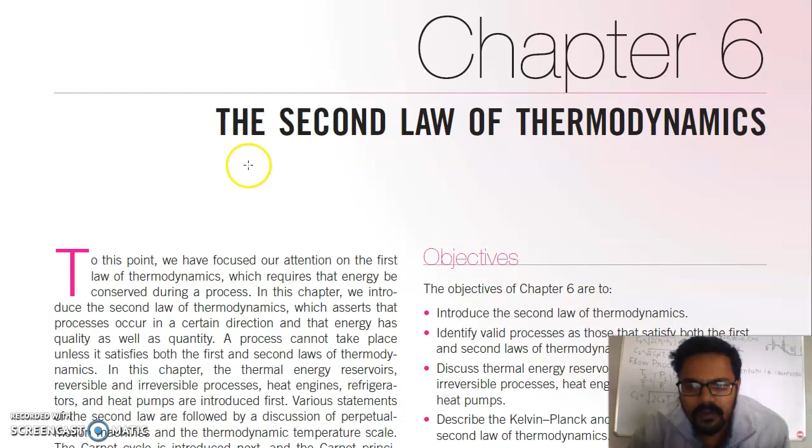Good morning. Today we will start with the topic, the second law of thermodynamics.

Up to now we have focused our attention on the first law of thermodynamics, which requires that energy be conserved during a process. In this chapter we introduce the second law of thermodynamics, which asserts that processes occur in a certain direction and that energy has quality as well as quantity. A process cannot take place unless it satisfies both the first and second law of thermodynamics.

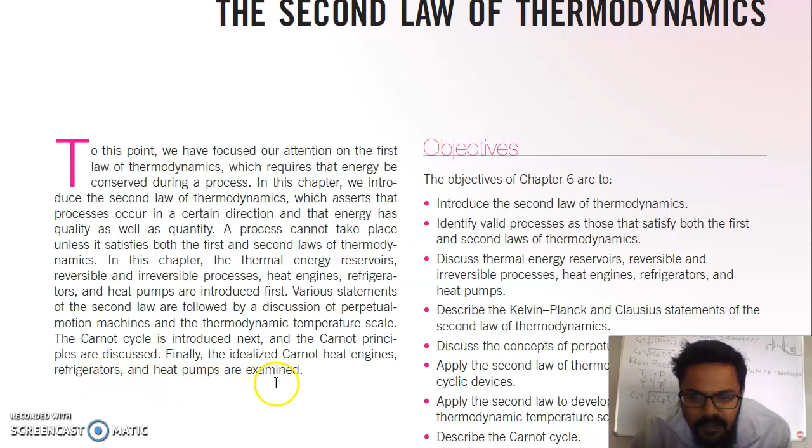In this chapter, the thermal energy reservoirs, reversible and irreversible processes, heat engine, refrigerator, and heat pump are introduced. Various statements of the second law are followed by a discussion of perpetual motion machines and the thermodynamic temperature scale. The Carnot cycle and the Carnot principle are discussed. Finally, Carnot heat engines, refrigerators and heat pumps are examined. Their performance is also discussed.

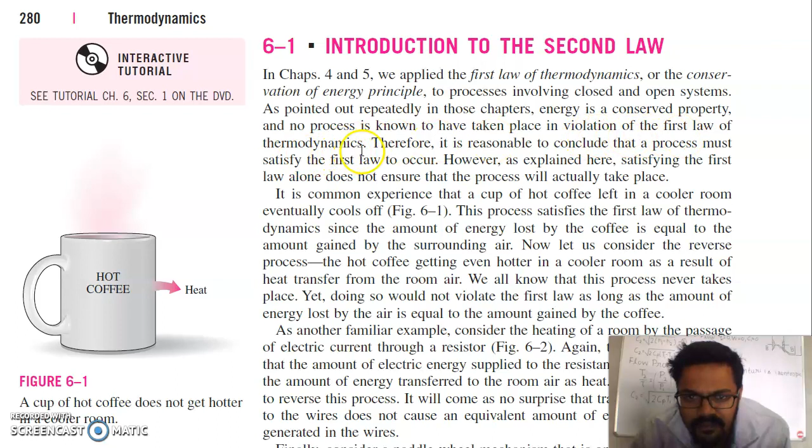So we will start from the first topic, that is introduction to the second law. The first law of thermodynamics, or the conservation of energy principle, applies to processes involving closed and open systems. As pointed out repeatedly in those chapters, energy is a conserved property and no process is known to have taken place in violation of the first law of thermodynamics. Therefore, it is reasonable to conclude that a process must satisfy the first law to occur. However, satisfying the first law alone does not ensure that the process will actually take place.

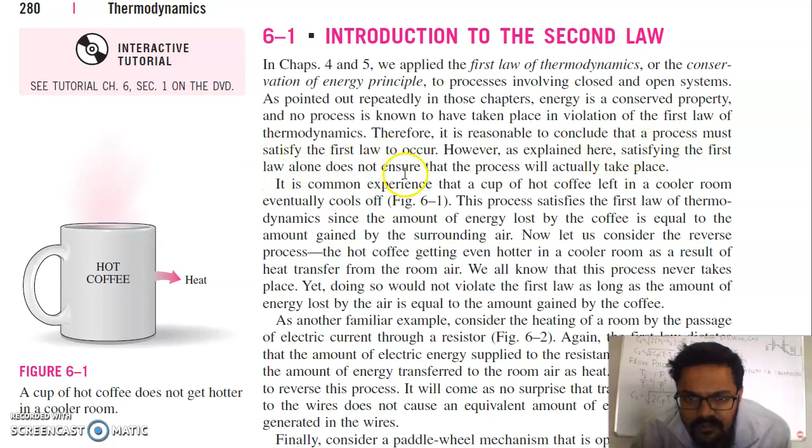It is a common experience that a cup of hot coffee left in a room eventually cools off. This process satisfies the first law of thermodynamics, since the amount of energy lost by the coffee is equal to the amount gained by the surrounding air. Now let us consider the reverse process, the hot coffee getting even hotter in a cooler room as a result of heat transfer from the room air. We all know that this process never takes place, yet doing so would not violate the first law as long as the amount of energy lost by the air is equal to the amount gained by the coffee. This means heat will flow from the hot coffee to the cold environment; heat can't flow from the cold environment to the hot coffee.

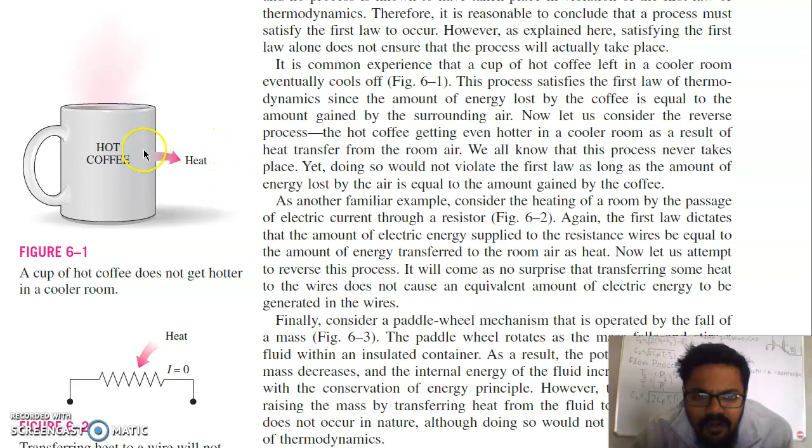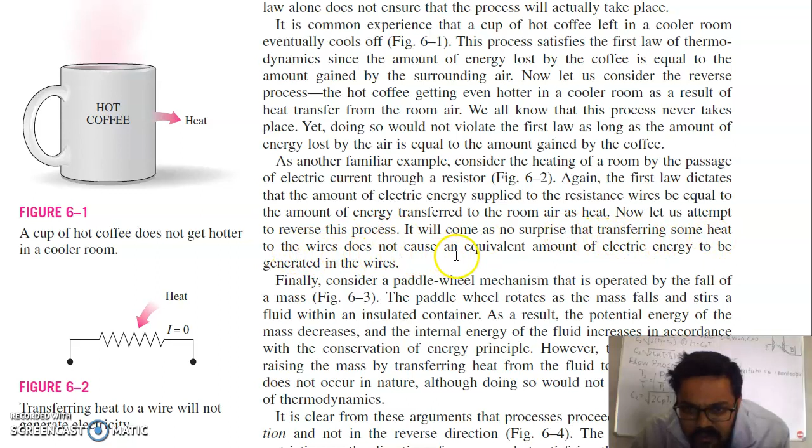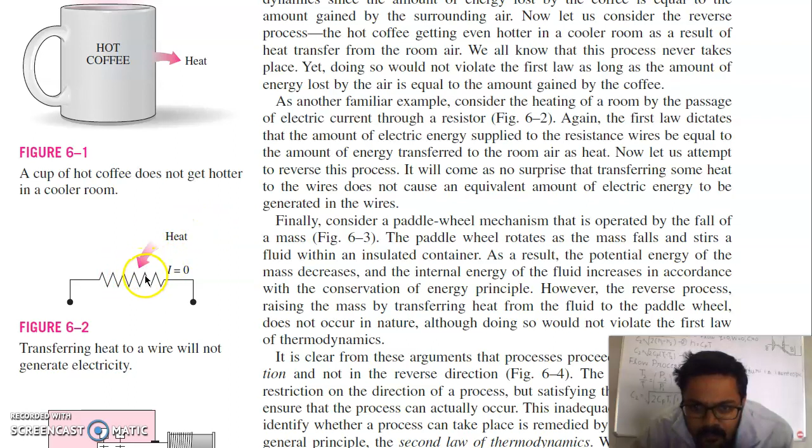Another example: consider heating of a room by passage of electric current through a resistor. This resistor will dissipate heat to the room. Again, the first law dictates that the amount of electric energy supplied to the resistance wire is equal to the amount of energy transferred to the room air as heat. Now let us attempt to reverse this process. It will come as no surprise that transferring some heat to the wire does not cause an equivalent amount of electric energy to be generated in the wire. If you transfer the same amount of heat energy as is generated by the heater, the reverse won't happen; the current won't be generated.

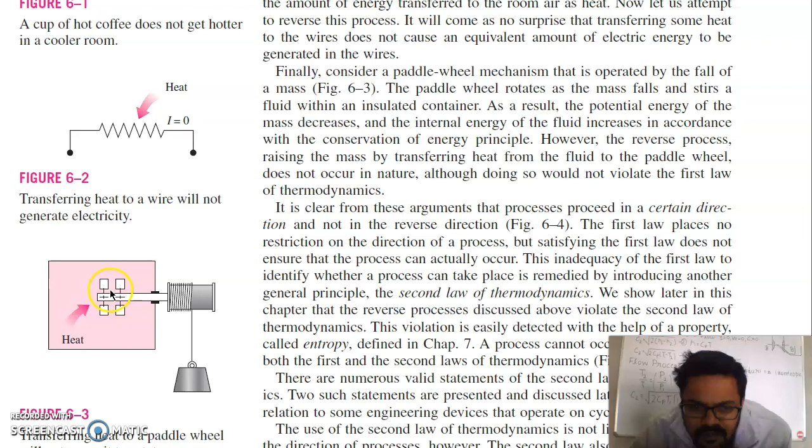Finally, consider a paddle wheel mechanism. In this example, the weight goes down, the paddle rotates and heat is transferred to the fluid. If you do the reverse, transferring heat to the paddles won't lift the weight. So it is clear from these arguments that a process proceeds in a certain direction and not in the reverse direction. The first law places no restriction on the direction of a process, but satisfying the first law does not ensure that the process can actually occur.

We are satisfying the first law condition that energy is conserved: whatever heat the paddles transfer to the fluid when the weight goes down, we transfer the same heat in the reverse direction. The first law is satisfied, but the process won't happen; supplying heat to the paddles won't lift the weight. This inadequacy of the first law to identify whether a process can take place is remedied by introducing another general principle, which is called the second law of thermodynamics.

We shall see later in this chapter that the reverse process discussed above violates the second law of thermodynamics. This violation is easily detected with the help of a property called entropy.

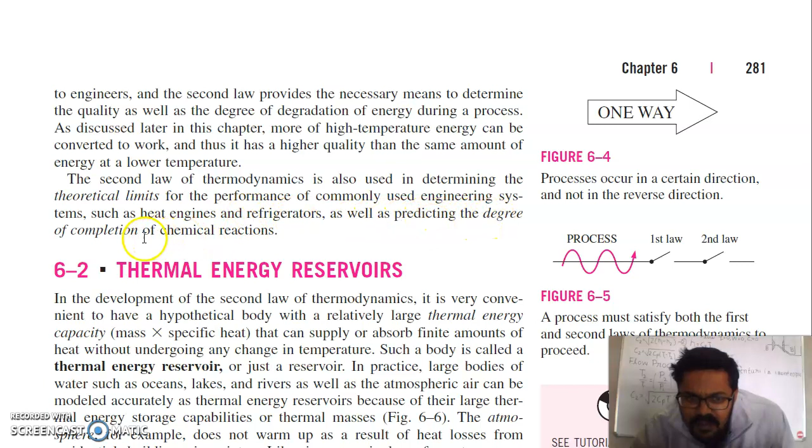A process cannot occur unless it satisfies both the first and second law of thermodynamics. So the second law defines that the process will occur in one direction. The second law of thermodynamics is also used in determining the theoretical limits for the performance of commonly used engineering systems such as heat engines and refrigerators, as well as predicting the degree of completion of chemical reactions.

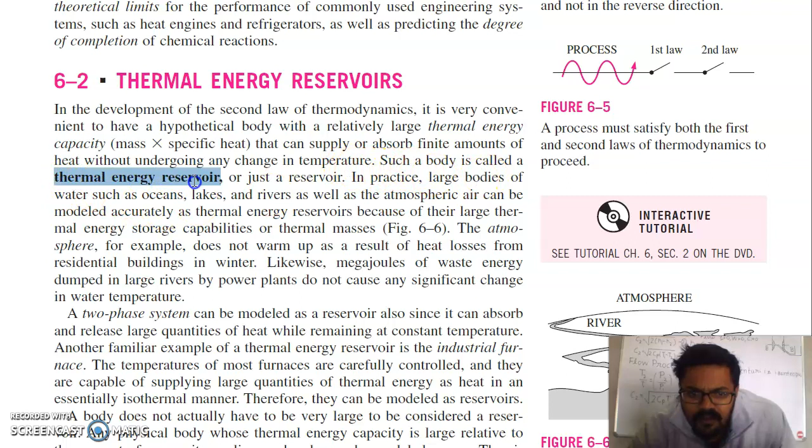We will start with thermal energy reservoirs now. In the development of the second law of thermodynamics, it is very convenient to have a hypothetical body with a relatively large thermal capacity that can supply or absorb finite amounts of heat without undergoing any change in temperature. Such a body is called a thermal energy reservoir. A large river, lake and the atmosphere we consider as thermal energy reservoirs.

In practice, large bodies of water such as oceans, lakes and rivers as well as atmospheric air can be modeled accurately as thermal energy reservoirs because of their large energy storage capabilities due to thermal masses. The atmosphere, for example, does not warm up as a result of heat losses from residential buildings in winter.

It is to be noted that the temperature of this reservoir should be constant, meaning its temperature won't get affected by how much heat you dump into the atmosphere or how much heat you take from the atmosphere. Its temperature won't decrease, won't change. Likewise, megajoules of waste energy dumped into large rivers by power plants do not cause any significant change in water temperature.

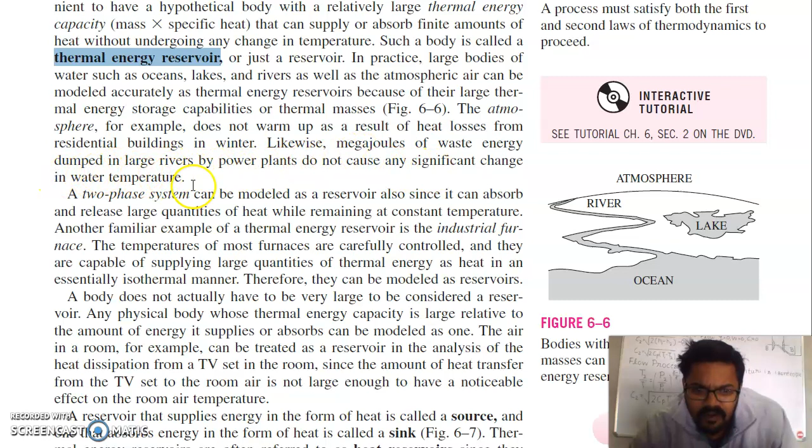A two-phase system can be modeled as a reservoir also, since it can absorb and release large quantities of heat while remaining at constant temperature. Another familiar example of a thermal energy reservoir is the industrial furnace. The temperatures of most furnaces are carefully controlled and they are capable of supplying large quantities of thermal energy as heat without temperature change, in an isothermal manner.

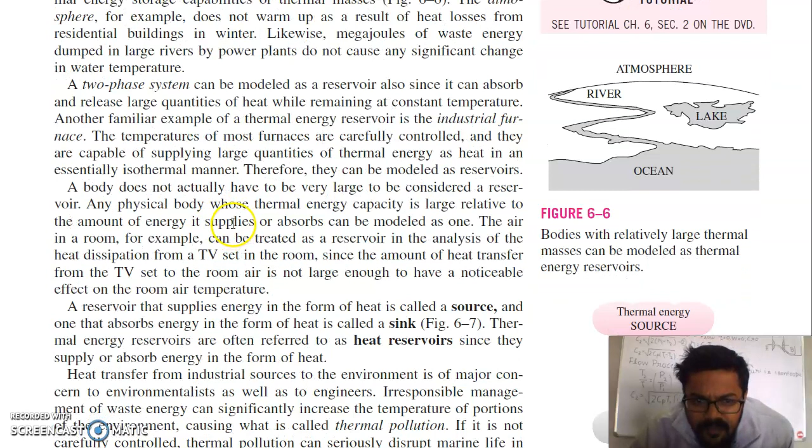A body does not actually have to be very large to be considered a reservoir. Any physical body whose thermal energy capacity is large relative to the amount of energy it supplies or absorbs can be modeled as one. The air in a room, for example, can be treated as a reservoir in the analysis of the heat dissipation from a TV set in the room, since the amount of heat transfer from the TV set does not raise the room temperature.

So a reservoir that supplies energy in the form of heat is called a source, that is a thermal energy source, and one that absorbs energy in the form of heat is called a sink, that is a thermal energy sink. Thermal energy reservoirs are often referred to as heat reservoirs since they supply or absorb energy in the form of heat.

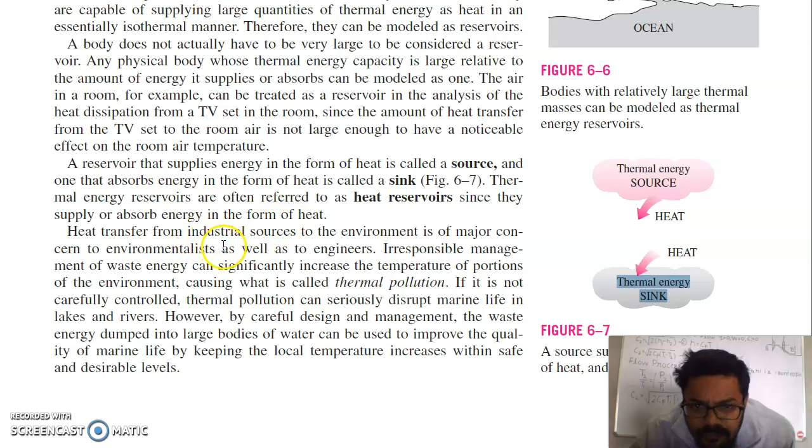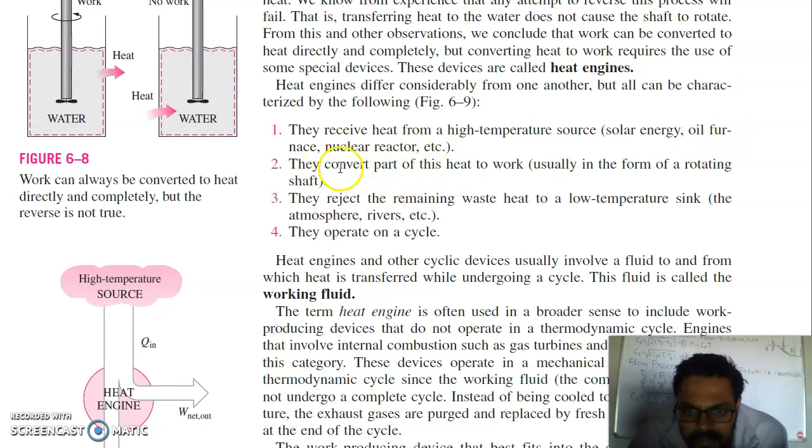Heat engines differ considerably from one another, but all can be characterized by the following. They receive heat from a high temperature source: solar energy, oil furnace, nuclear reactor. They convert part of this heat to work. They reject the remaining waste heat to a low temperature sink. They operate in a cycle.

So part of the heat received by a heat engine is converted to work while the rest is rejected to a sink. So this is your heat engine. It will accept heat from a high temperature source and it will reject some amount of heat to a low temperature sink, and the difference of this inlet and outlet heat will convert into work.

Heat engines are cyclic devices, usually involving a fluid to and from which heat is transferred while undergoing a cycle. This fluid is called the working fluid. The term heat engine is often used in a broader sense to include work producing devices that do not operate in a thermodynamic cycle. Engines that involve internal combustion such as gas turbines and car engines fall in this category.

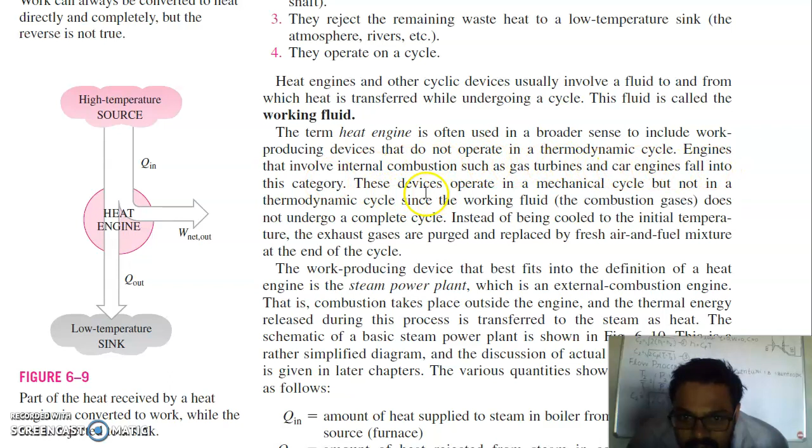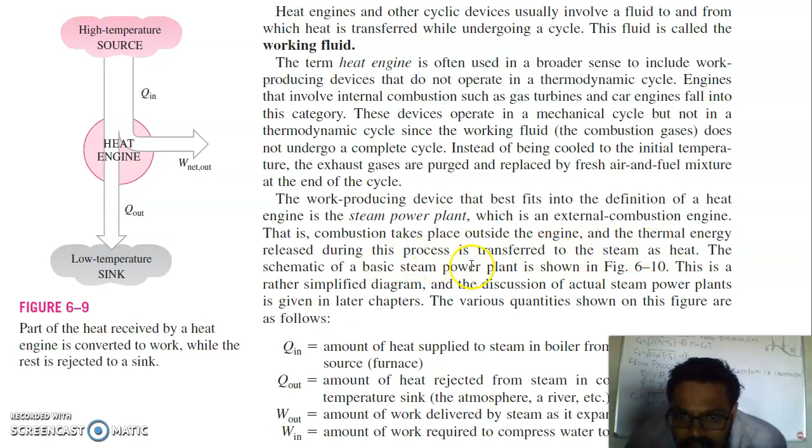The work producing device that best fits into the definition of a heat engine is the steam power plant, which is an external combustion engine. That is, combustion takes place outside the engine and thermal energy released during this process is transferred to the steam as heat. The schematic of a basic steam power plant is shown in the figure. This is a rather simplified diagram. In this figure, you can see we have four components: pump, boiler, turbine, condenser.

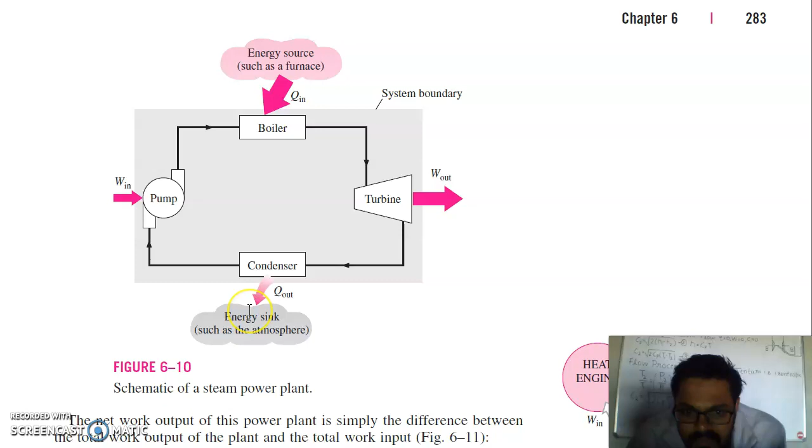Pump is a power consuming device. Turbine is a power producing device. In the boiler we will transfer heat. Condenser will reject some amount of heat to the environment, such as atmosphere, and it will change the phase of steam into liquid again, which will be further pumped back to boiler.

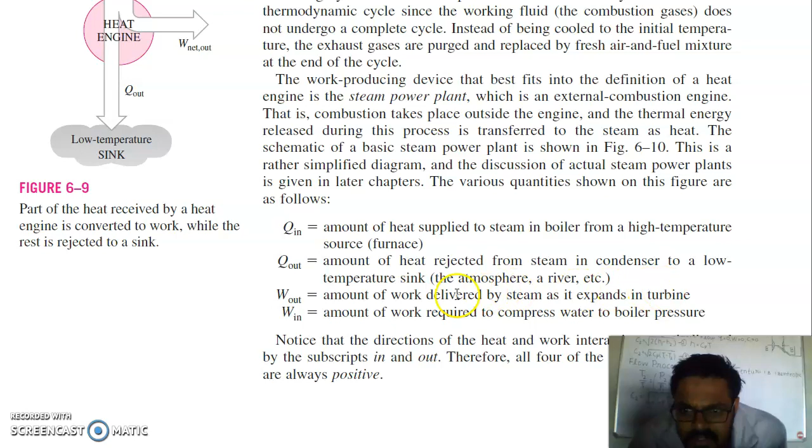So Q in: amount of heat supplied to steam in boiler from high temperature source, furnace. Q out: amount of heat rejected from steam in condenser to a low temperature sink. W out: amount of work delivered by steam as it expands in turbine. W in: amount of work required to compress water to boiler pressure. So work net output is equal to work out minus work in.

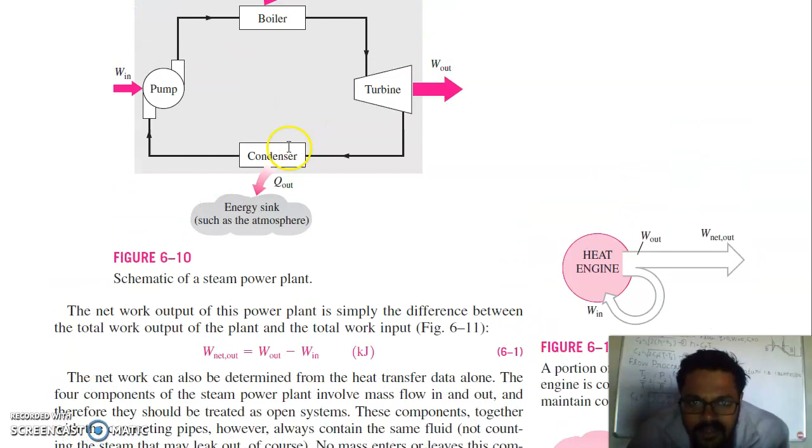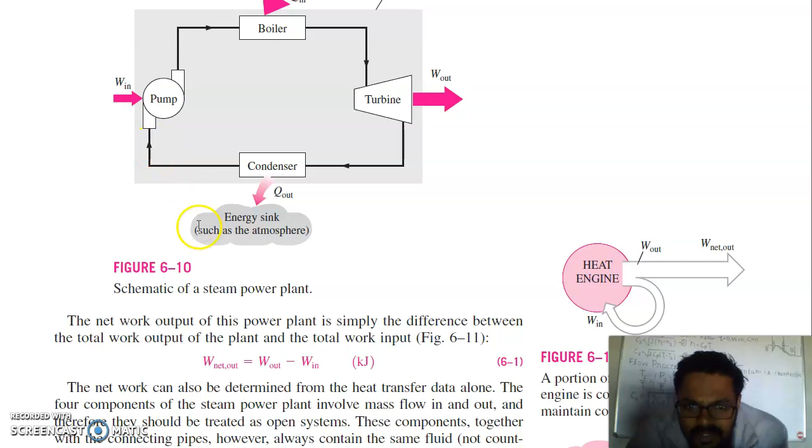Because this is a cyclic process, whatever the water condition at inlet, after the complete cycle the working fluid is at the same condition. It means internal energy of the fluid will remain same. So if internal energy is same, your work net output is equal to Q in minus Q out. It can be analyzed as a closed system.

Recall that for a closed system undergoing a cycle, the change in internal energy is zero, and therefore the net work output of the system is equal to the net heat transfer to the system. Thermal efficiency, this is another concept, because if there is a cycle, definitely there is an efficiency related with the cycle.

You can see here, in this case we have two engines. One is taking 100 kJ of heat, wastes 80 kJ of heat, and net output is 20. In the second case, net work output is 30. So only part of heat transfer to the heat engine is converted to work. The fraction of heat input that is converted to net work output is a measure of performance of heat engine and is called thermal efficiency. For heat engines, the desired output is the net work output and the required input is the amount of heat supplied to the working fluid.

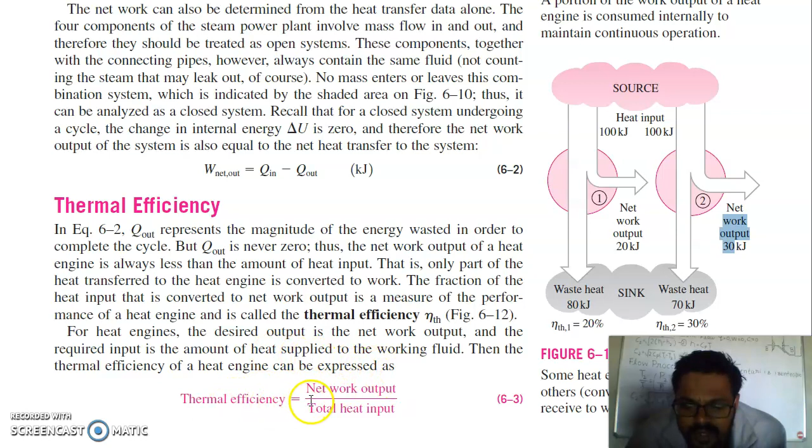Then the thermal efficiency of heat engine can be expressed as: thermal efficiency is equal to net work output divided by total heat input. Cyclic devices of practical interest such as heat engines, refrigerators and heat pumps operate between a high temperature medium or reservoir at temperature TH and a low temperature medium or reservoir at temperature TL. To bring uniformity to the treatment of heat engines, refrigerators and heat pumps, we define these two quantities.

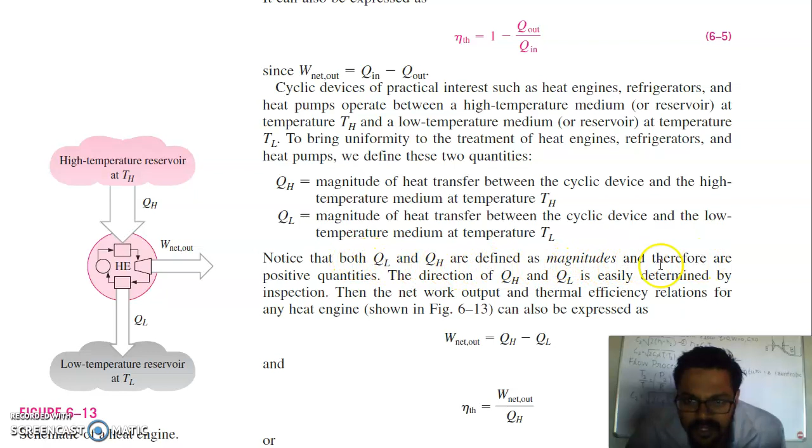QH, magnitude of heat transfer between the cyclic device and the high temperature medium at TH. QL, magnitude of heat transfer between the cyclic device and the low temperature medium at TL. So notice that both QL and QH are defined as magnitudes and therefore are positive quantities. The direction of QH and QL is easily determined by inspection.

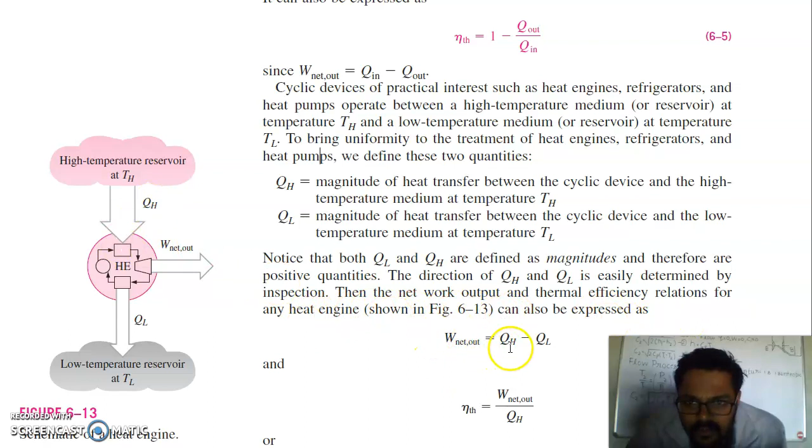Then the net work output and thermal efficiency relations for heat engine can be also expressed as: net work output is equal to QH minus QL. So thermal efficiency is equal to work net divided by heat supplied. So the thermal efficiency of heat engine is always less than unity since both QL and QH are defined as positive quantities. This is positive, this is positive. So overall efficiency is always less than 1.

Even the most efficient heat engines reject almost 1/2 of the energy they receive as waste heat. So this is an example. 100 megajoules of energy is given. Only 55 megajoules is converted to work. Rest is wasted.

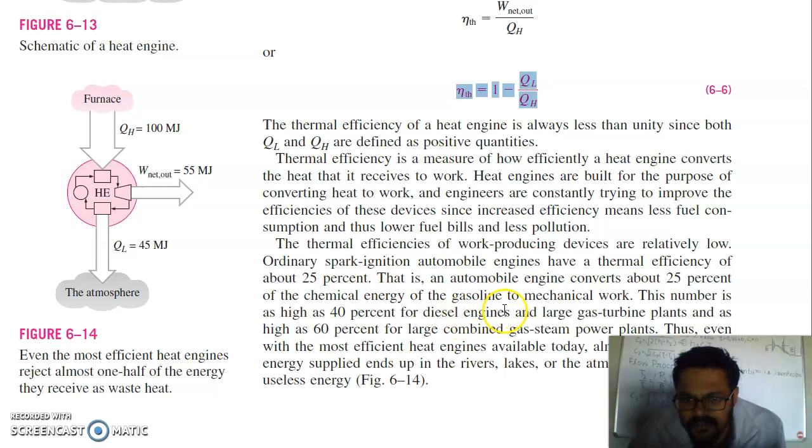The thermal efficiency of work producing devices is relatively low. Ordinary spark ignition automobile engines have a thermal efficiency of 25%. That is, an automobile engine converts about 25% of chemical energy of gasoline into mechanical work. The number is 40% for diesel engines. So this is about heat engines.